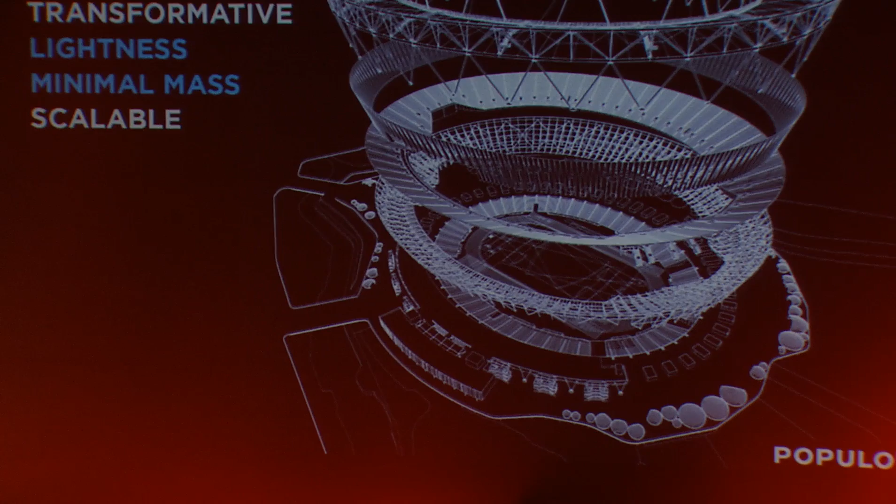Just to fast forward — what was really profound about this design concept, from our perspective as a stadium, was the fact that it was designed to actually be dismantled. That's not an easy thing to do. It was originally built to hold 80,000 seats, even more for the opening ceremonies. The whole concept is based on a stadium, and I'm specifically talking about the upper tier — the upper tier can be dismantled, the seats are all removed, and it's carted away and recycled, reused and formed into something else.

So what it left was a much smaller venue, a 25,000-seat stadium that suited what looked like to be the nature of the need for that particular district within London. So it was very transformable in its notion.

And here's another example, and that's the way this is going to go. I'm just citing examples, and I'm just trying to stretch your imagination a little bit.

This is an MLB, Major League Baseball project in Florida, the Marlins, and this concept was from 10 years ago as well. It was built for the Miami Marlins, so it was a baseball-centric client, but has a highly transformable kind of solution. It has a retractable roof and a retractable outfield wall, which you can see. That retractable wall is basically sheets of glass that slide on rollers, which open up and give the building the feel of an open-air ballpark, and this is Miami. It focuses a view of the city, so it brings the city into the venue.

And I have a little bit of video here, and I'm going to talk through it. There's no sound to it, but it'll show you the notions of some of the transformable content within the architecture that we embodied.

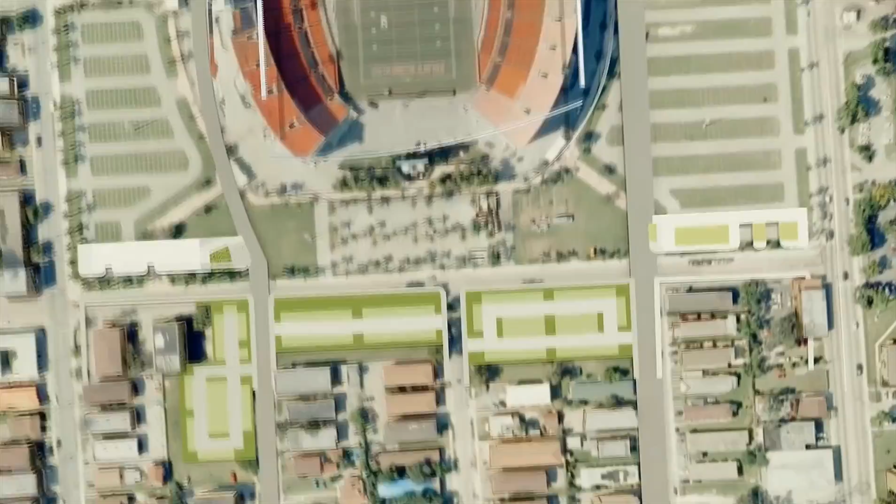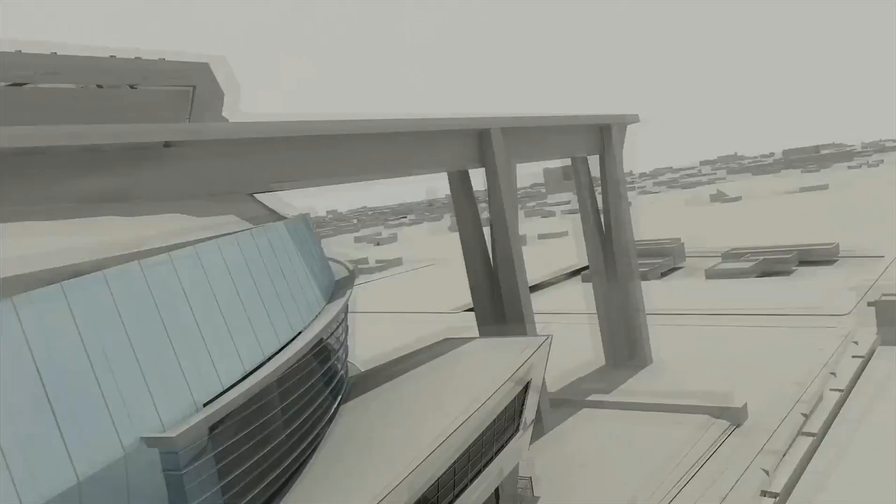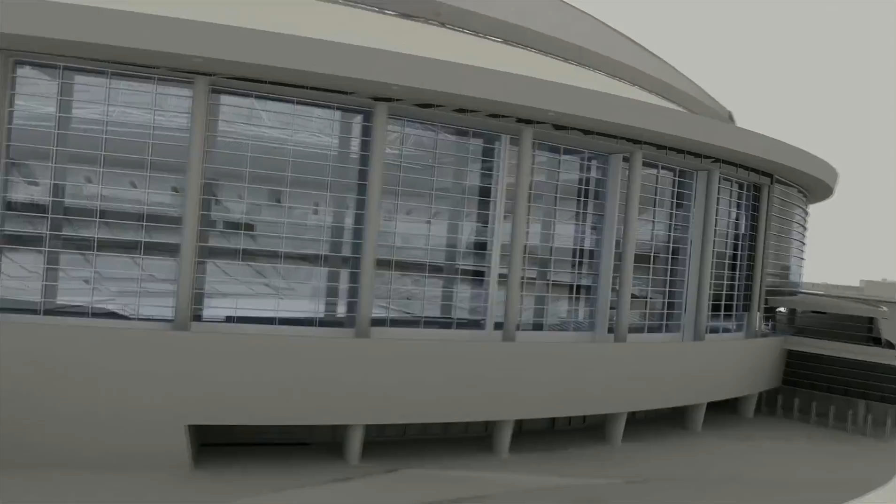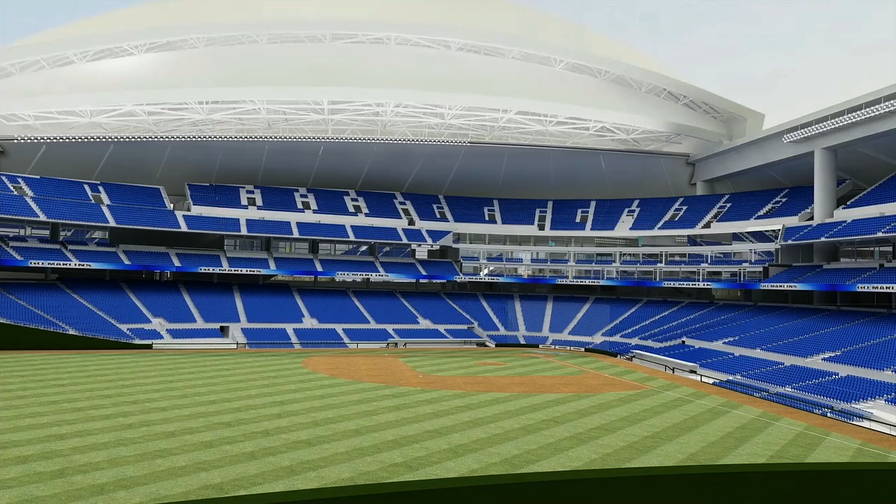There we go. This venue replaced the Orange Bowl, so we removed a building that was essentially falling down and replaced it with a venue. This video will begin to articulate some of the transformable features. Again, it was built very specifically for baseball, so I think our own criticism would be that we probably should have pushed harder on the client to think about these features and allow this building to do more than just baseball.

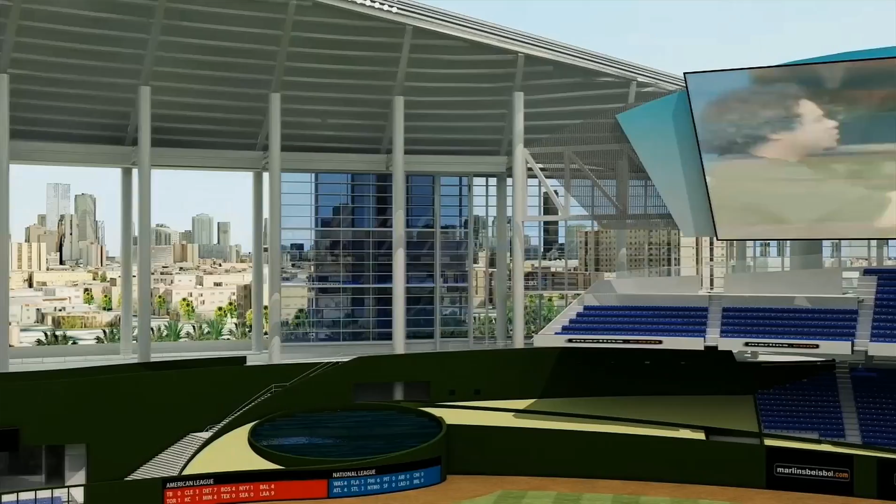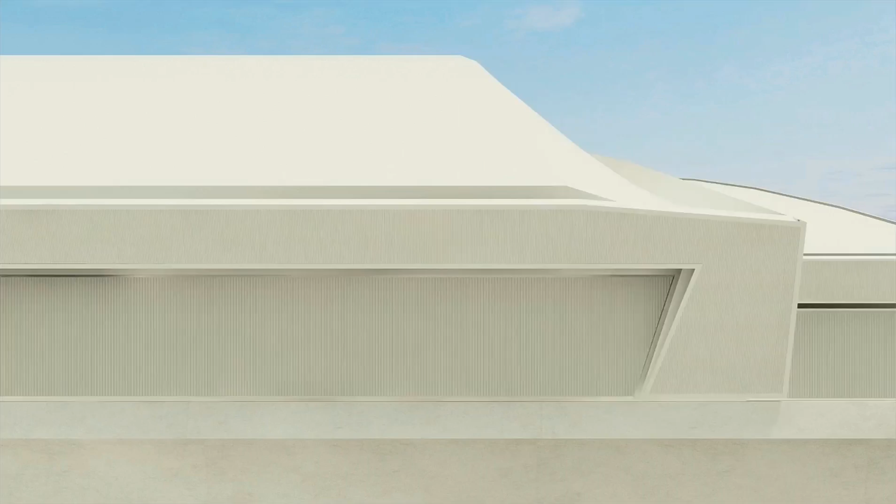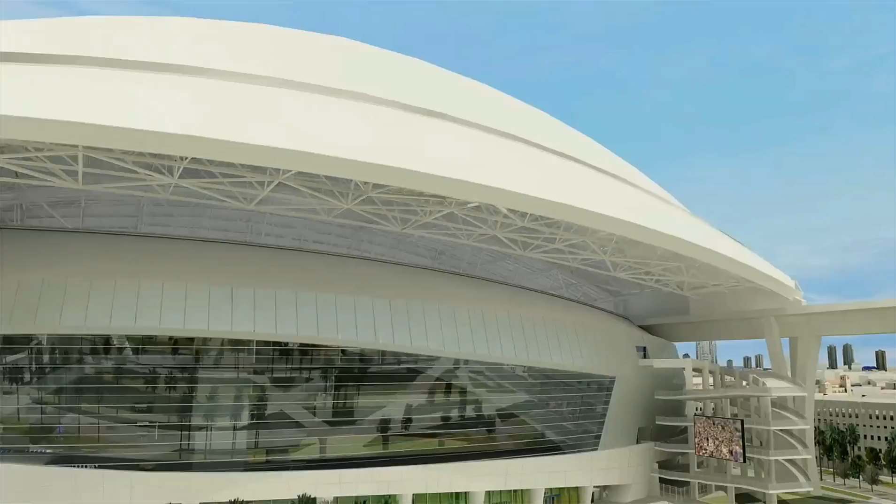Baseball is kind of a unique building, and it's a big challenge in a lot of ways because the volume is pretty massive. The baseball can come off the bat on a pretty tall trajectory that you have to conform to in order to make that game playable within MLB standards. So the roof moves in 3 panels. It's like 12,000 tons of steel, and what's ironic here is it's in a hurricane zone. So a lot of very interesting engineering tactics are used here to create a building that's highly transformable.

And here's the result, a glamorous photo shot, of course, and we use the roof panels of the park to form a grand entry plaza. When the roof is retracted, you go into the venue and you're exposed to a lovely baseball field.

So here we go, we're looking a little bit into the future, kind of a what-if. Do we need to build stadiums that are freestanding objects in the urban condition? Can the building really be considered part of the fabric? So this idea is, rather than an MLB stadium that transforms technically, thinking about a building that's actually sited in a central park, or in the center of the city, and letting the building just morph into its condition.

I call it the living room of the city, is kind of the idea. Fundamentally it's a park, so you can exercise on the roof, for example. It may have buildings cropping out of the ballpark, and maybe all the support amenities at the ring of the seating bowl aren't necessarily concessions and restrooms, maybe it's offices or apartments or something. So it's got this inside-outside sort of porosity or transparency.

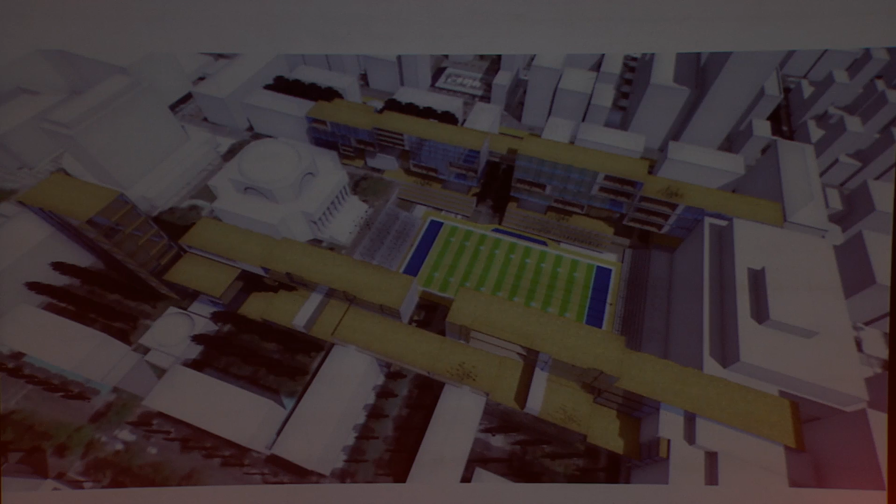So what I said to myself is, why can't the central quad, or the central piece of the campus, actually be the venue? Does it have to be elite sport, does it have to be an elite football game for a performance to take place? So why not put the venue in place in the central quad of the campus? And as the campus grows, think about the growth of the building to complement the classrooms, to actually form as the viewing platform onto the field of play.

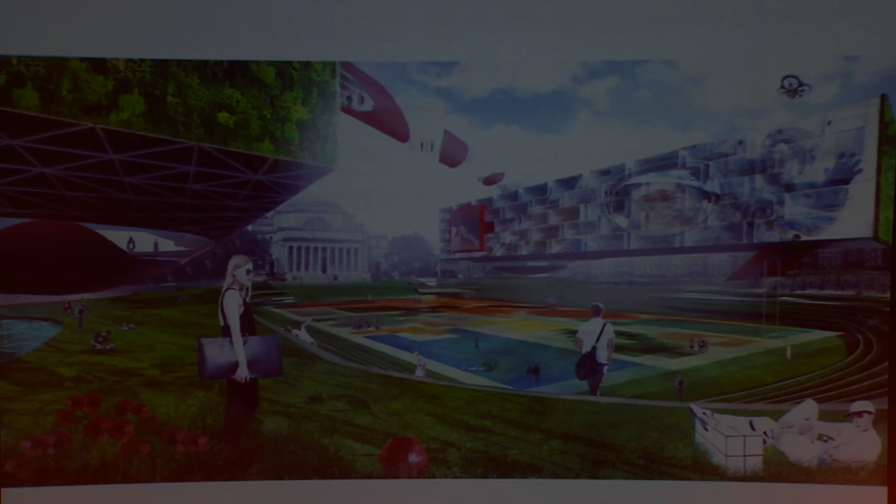I'm showing football here, but it could really be anything. So that's kind of the idea. It's a sort of a non-stadium, if you will. It doesn't really exist as a stadium. The buildings on the periphery sort of perform as the viewing platforms, but they also perform as the laboratories for the students. So fundamentally, the students are the performers.

This is sort of my prediction that education will change in the future. Students will no longer be taught subjects, they'll be trained to perform. So fundamentally, every student is an athlete, and the performance stage is the campus itself. So there's the transformation: an outdoor classroom transforms into a stadium, a venue that sees an event.

Here's another idea. This one is looking at what else beyond sports could there possibly be that we need facilities for. Gaming is huge, particularly in China. We see just a proliferation of gaming as a sport in a lot of ways. So we came up with this idea of, could there be an arena that was transformable? The thought is that the players are in these modules that are robotically released out of their modules and put into the center stage and compete. These are the modules. The building might be a series of modules.

Another thought I wanted to plant, and we're doing this, and it's really fascinating to me. The Super Bowl in the United States is a huge event. The Super Bowl's on Sunday, but fans come to these events 7 days in advance. So it's a huge opportunity to create a venue that's not about the stadium, it's really about the city.

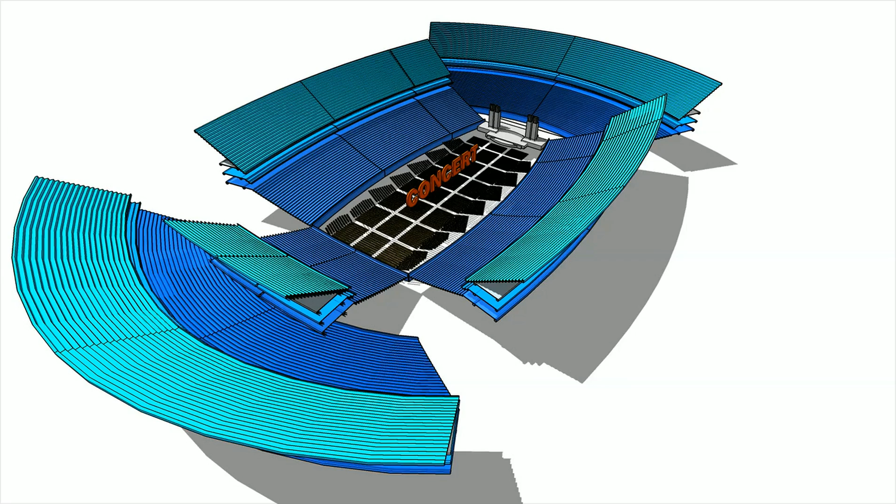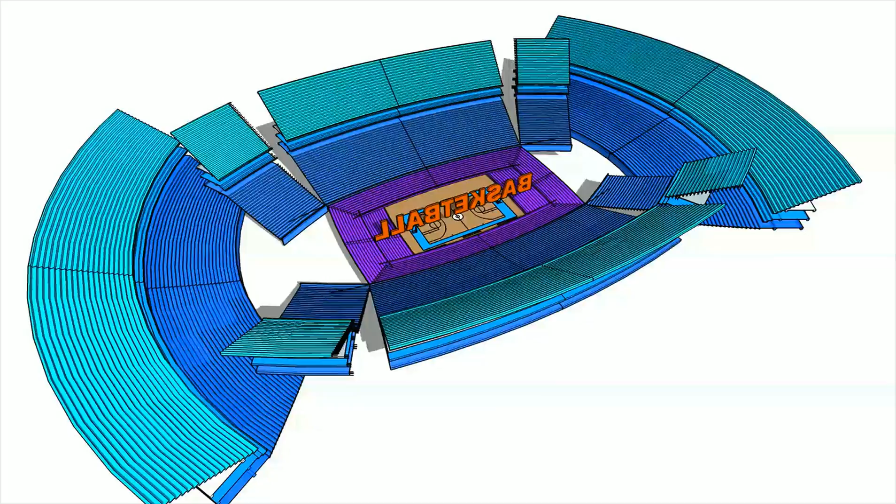You'd have to imagine this inside an envelope, perhaps with a retractable roof associated with it. But can the seating sections literally be mechanized at the push of a button and change configurations so that the fans are brought closer to the action, then expand out to form the next scale of field necessary out to soccer, which is one of the largest.

So I think it's quite viable to think of these buildings as transformable, in the way that there's a technique that actually moves the architecture.

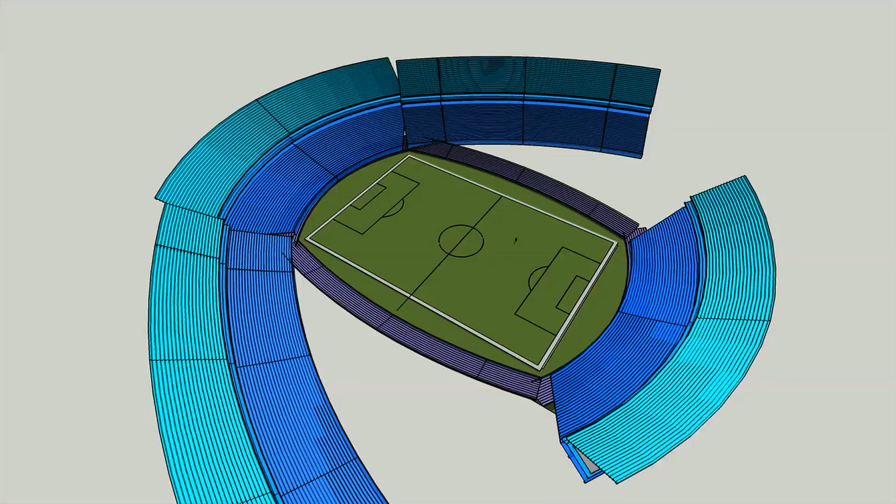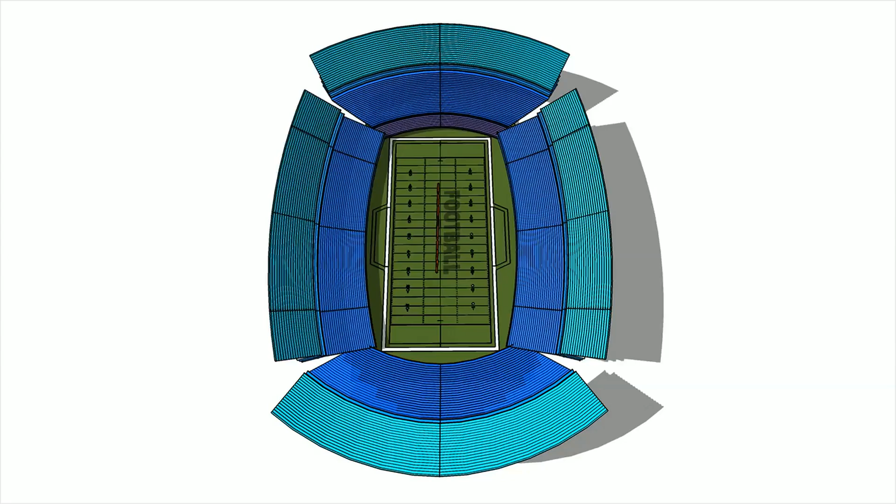Baseball, of course, is a very unique configuration. It's more of a square compared to a football pitch, which is more rectilinear in nature, but this idea captures those configurations from football to baseball and puts this into place. It's somewhat rational, I think - it's taking all the parts and pieces that are there and using them, not tearing the section down and replacing it. It's moving all the pieces to hinge into a configuration that supports the event.

Number 8 here is another idea - this was me dreaming on my kitchen table a little bit, and it's kind of out there, but I thought about it: could we design a stadium that floats? Could we design a stadium that's modular in effect, where the modules interconnect and dock in various configurations, anywhere from maybe two baseball pitches to a smaller tennis kind of situation, to a larger soccer venue, to maybe even horse racing or something, and it floats to the city.

So I thought it had a lot of opportunities, because then you would just build one stadium or one construction piece, and it floats to various regions. Of course, it wouldn't be practical here in Mexico City, but there are a lot of wonderful port towns, and you can imagine this venue floating in place.

I call it the Blossom, because the idea is that it retracts - it has a kind of telescopic situation to it, so it's a kinetic piece of sculpture in a lot of ways. Each time it docks, it could be configured into a variety of different configurations that maybe speaks to the location in which it's docked.

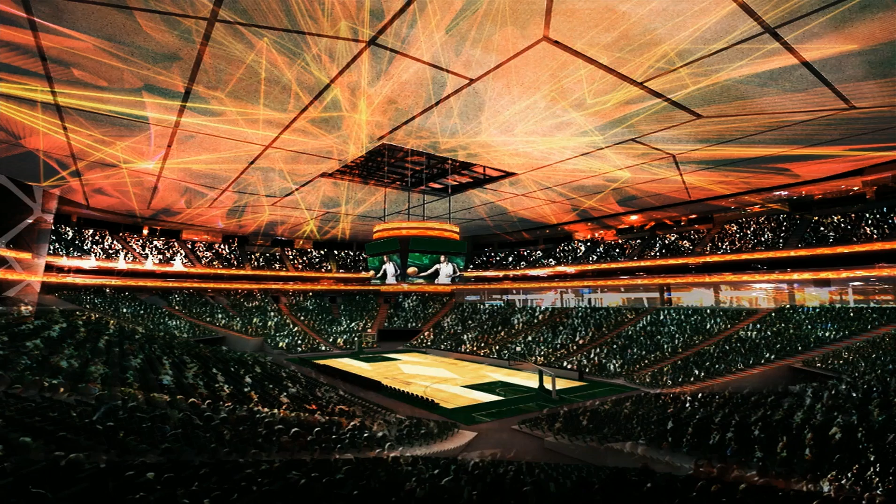So we came up with this idea of essentially a floating ceiling - you can see what happens. It's got two tiers. Could we drop the ceiling down so that it basically shuts down the upper deck, and it really brings the capacity down to a more intimate condition for basketball? It could expand out to hockey, back to basketball, and could the ceiling continually morph in condition to form a more intimate concert venue.

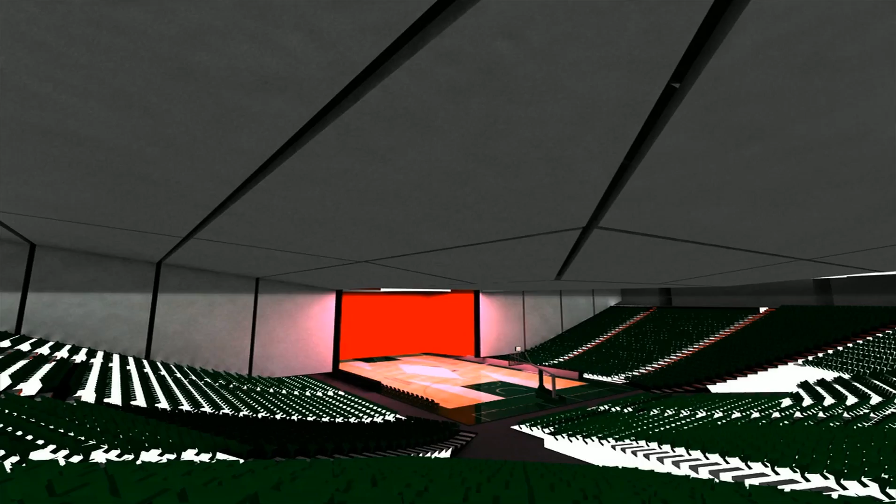This is a pretty simple tactic, I would imagine - it's a floating ceiling of panels that are on a pulley system or something, and to me that would be a real sustainable solution. It's really creating that kind of added usage to these venues that wasn't originally intended, but that's the name of the game in the future, in my opinion.